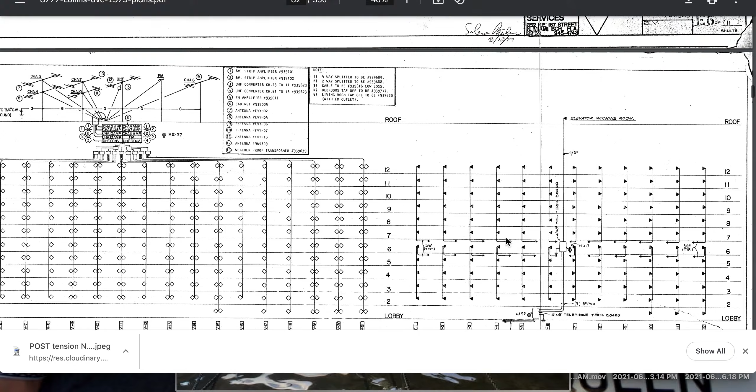I've been going over this pool thing with the drawings, trying to see how many columns away the pool is. Would it not be two-directional though? Would it not also go to the left, to the building on the left, where we have the image of the caving down? So the pool is roughly here. Why did it not go in this direction also? Why this direction? Remember, it's pulling, and where we get a pull here.

So let me go to the video someone shared with me. This is the name of the video - a structural engineer. Well, I'm biased because he's supporting my position also, saying that a column, a column first. Listen: area of expertise, what kind of preliminary conclusions have you reached?

Obviously, in the video, it's very dramatic. And it looks like a support condition at one of the lower columns towards the middle of the building. Support condition, lower column, middle of the building. That's what I came up with too when we look at this.

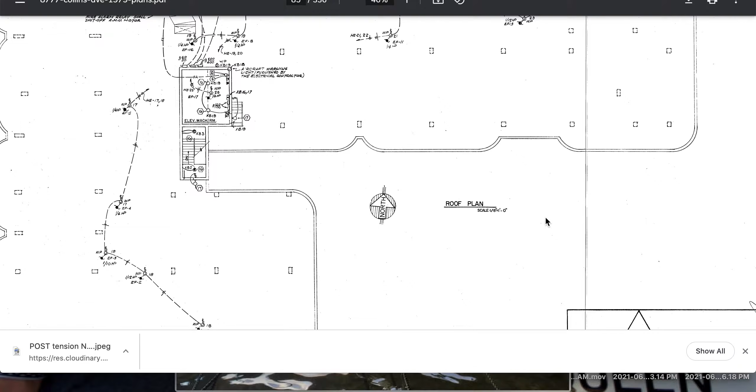But I try to make it work with this pool too. So I have to have the pool ripping down, but the pool rips this way too, and it only tears to here, and it pulls down maybe the decking to right about here. Well, everyone has this tearing way over to here and doing it.

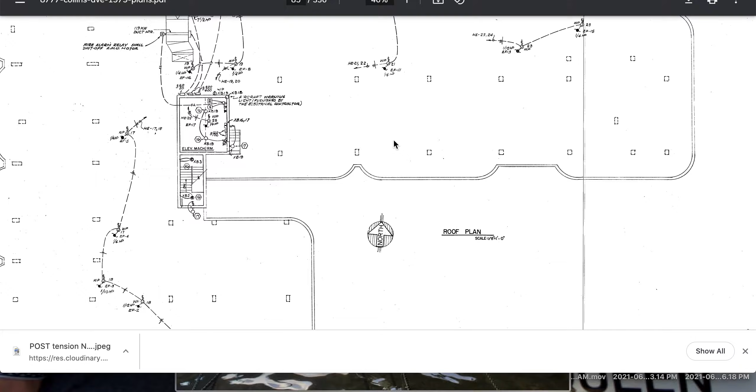I don't know which room she's in, the fourth floor. That would be very nice to be able to, fourth floor looking out. But he also has it there.

Has it there. So let's go back to what he said there, around 2:20, 2:15.

Of the missing are questioning whether this tragedy had been foreshadowed. I've been told of flooding in the building, of construction work and sinkholes, but the mayor says it's not the time for apportioning blame. No Australians were involved in the Miami building collapse. Consular assistance is being provided to two Australians.

All right, so let's go to his other video. Maybe it's 2:15 in this one. Let's see what he has for us.

Crews say a fire burning in the wreckage of Thursday's deadly building collapse is slowing the search for survivors. I think I'm trying to brace myself for the worst and the best, and it's really hard just not knowing. It's just the worst part.

It's interesting. We show it going pretty fast, but now this guy's saying he had time to make a phone call. She had time to make a phone call. So,

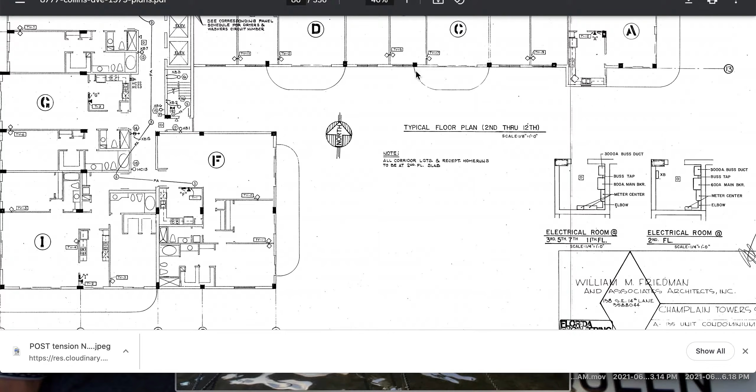That's useless. So look, can we get the pool going first? I'm working on that. I'm working at there. I'm trying to find the columns that would pull as the decking falls. That would pull on this guy right here. You know, are they in line? Out the supports out to the pool. So I'm working on that.

I'm trying to make it happen where the pool can reach that far with all those columns there, the supporting columns, that it could somehow just start pulling them all down and make it over there and then pull on that one column by chance.

I don't have it because we have a collapse over here. It's evident, this goes down. It appears it goes this direction, and as it's shearing this direction, it takes out the underside of this decking here out to here, and then there's the car loads on it.

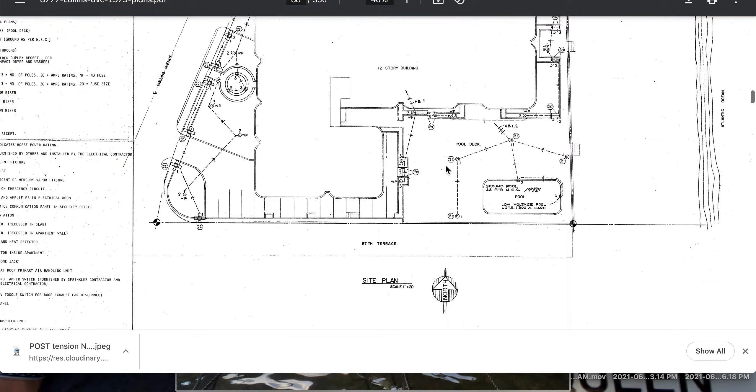So I'm going to try to work on the pool thing here, but can we have that liquefaction going on, something that caused it? That brings us back to that damn earthquake guy that I said was ridiculous.

That's a weird thing. It is. We have an image like this. Give me a second here.

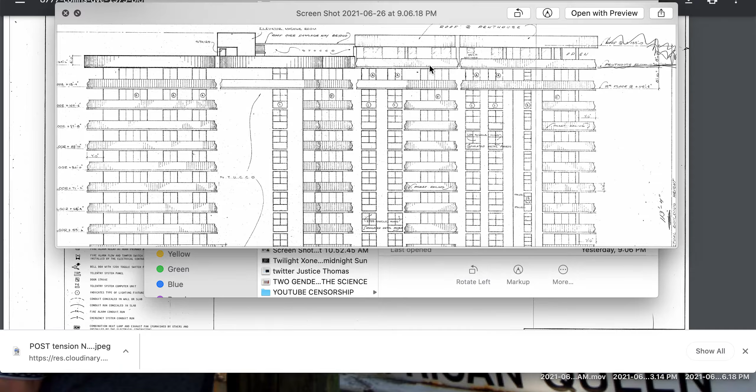Okay, there it is. So it's concrete, I'm sorry, let's step back. So this was a concrete top, railing, and railing. And that is a railing, but there it appears to be concrete.

So it's got some extra loading going on there. How much of significance? I don't know. We got some breaking up here, but we also have breaking down the bottom, buckling down the bottom of some type. So this could kind of be explained with this transition of if it's still existing per plans. And the plans didn't change because they might give us a red herring, looking in the wrong direction.

That's 4,000 psi concrete up here, I think it is. They reduced it, and yet they added more loads. So that could be an issue, and that would be right about where the next transition to 5,000 psi would take over. So you could have this 4,000 failing with the extra loads hitting, and the 5,000 being the delay before the next break happens.

And also you need to know the contractor, you need to test this concrete. They got columns and they got the concrete pads there, they can test that stuff. They can core test it still.

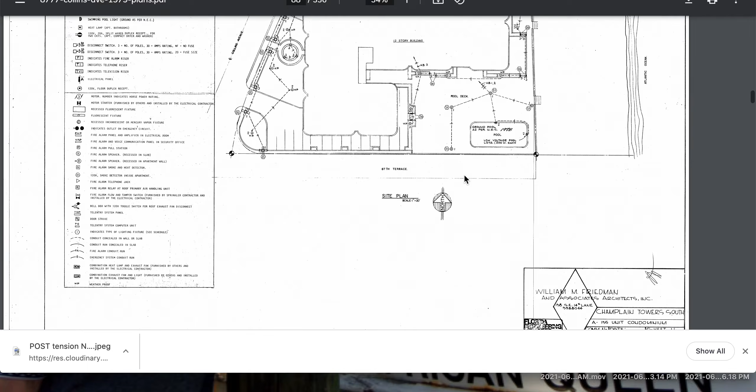Okay, so I want to end the video with that, just saying that I'm trying to make the pool tie in the columns of that deck, the columns of this deck over to here, but this pool is pretty deep. As you can see, it doesn't appear to be connected column-wise. No columns are underneath of it supporting it. But yet people are talking about the pool caving in.

I'd like to see a picture of the image now of the pool. Did it cave in? Did it rotate? Or did just around here rotate? Or did everything around it rotate? Because you can see there's no columns underneath of it.

Bottom of swimming pool, and we're at the garage level floor plan. And they're saying it's the bottom of the swimming pool, and then there's your columns. So I don't have the pool. I mean, I really tried to see if I can get you over there from here, type thing.

They saw the pool cave in, and I think maybe they're looking at this cave in, but nevertheless we need to get this to cave in. And that video that they have is being quite nasty, not giving up the beginning of it. It just jumps into the collapse here.

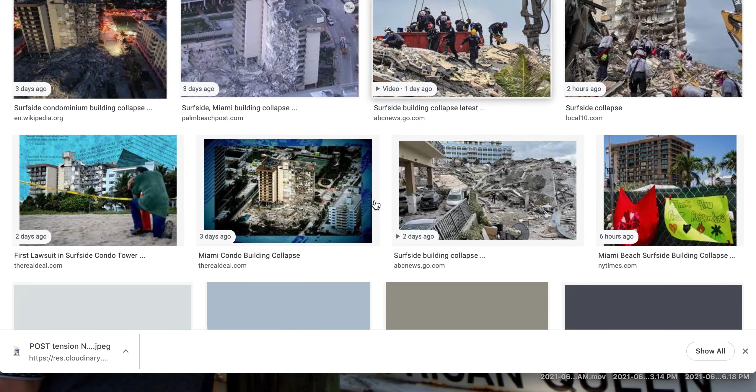I remember that because I've commented to that effect with you guys, saying, look, they're the numbers on the columns. And with the firemen, where were they? So Twitter has it. Hold on, I've got to go to Miami-Dade Fire Department, and then I'll end the video with that.

Yeah, taking a minute to get loaded up. Yeah. I thought I was following them. I guess I'm not. It was in Miami-Dade.

Okay, they're lifting out the slabs and columns and straps. I like that. They need to label it though, forensically label it now. This doesn't appear to be labeled. No way they're going to put that back down on the slab, right?

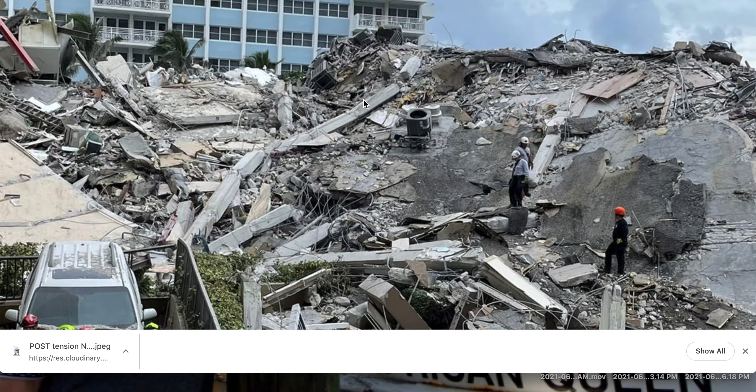So I don't get there from here, meaning I can't pull it over. You do see where these decks pancaked, and when they pancake, they sheared themselves from the column, the support columns, and you can see 1, 2, 3, 4, 5, 6 floors sheared themselves from the column. This would be one of the best indicators right here - how many floors sheared themselves, pancaked, because they didn't break and take a column with them.

They sheared from the column. Well, I can count the one above it then, I guess, can I? 1, 2, 3, appears to be 4, 5, 6, 7. Oh, this is the building, the back wall. I think it's the back wall because this is the roof, and that'd probably be the back wall.

Once it went down, it probably stripped itself down, and this column happened to fall this direction, which was very nice - it didn't fall in the street as much. But here it is there. The heads of these guys are gone.

This looks like one level. That looks like one level. There's no steel sticking up here. So this is the pool deck level, I believe, right here. And there's your - yeah, because that's your numbering below, and there's nothing above it. I don't think so. I think this is your pool deck level, and now they're not showing the pool in this image.

Isn't that great? It came that close to showing the pool, and it's not shown. And then here's the cars. They went down one stairs, one flight from here. Yeah, I don't have - and then right about here, it's our luck again, right? The pool's right about here, and we can't see it.

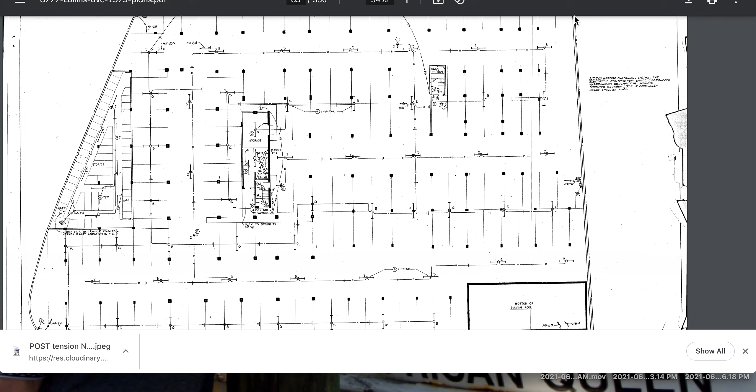Let's see, let me show you the image again. And so they're not, they can't be one of the ones that are standing. Obviously, you just can't have that. So you can't have your cake and eat it too. You can't have it be one of these columns.

No, and no, and no. So if you guys can triangulate what 28 is, 42, and whatever's in front of the 42, then it can't be these guys. These guys can't, and there was no lateral movement that tugged on a building at that point from there, because you can see it's just punched right around there, which is, the phone calls are killing me here, and the video's killing me, because you can't have a cake and eat it too.

You can't have two witnesses, apparent witnesses, stating that they see the pool dropping. The pool that appears not to have dropped, they're hiding images of that. But we have no 28, 42 in this one. This is all just around the pool dropping.

Could they have seen the deck drop and confuse it for the pool? Yes. And then we have this total collapse. All right, so that's where I am now. I'm working it out.